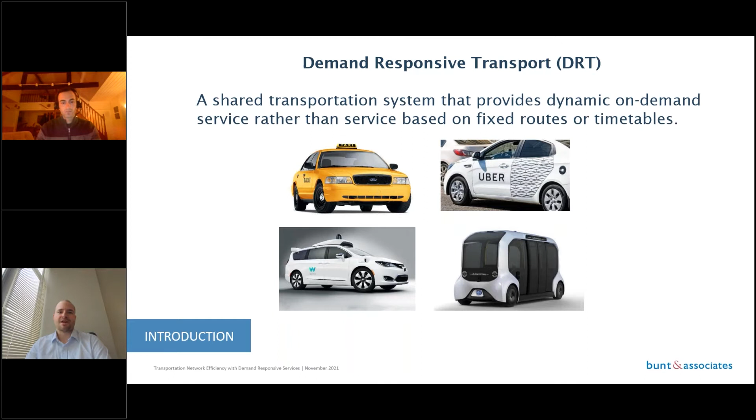When we think about the long-term future of transportation, it's possible that both private vehicles and transit systems could largely be replaced by DRTs. Many studies have looked at this question and evaluated the overall impacts on a city when compared to private vehicle use, considering scenarios with and without existing transit systems in place. The primary difference with this study is that we looked at a more direct comparison between DRT services and traditional fixed route transit services. Specifically, how would the performance of very high frequency fixed route transit compare to a DRT system? This is an important comparison because in a future where AV technology allows for low-cost DRT systems, this technology would also allow for low-cost, high-frequency transit services. So by understanding the advantages and disadvantages of DRT systems when compared to both private vehicles and fixed-route transit, it allows you to plan for future transportation networks in ways that provide the greatest overall benefits to users.

For this study, we used a software tool developed by PTV that simulates DRT services called MaaS, which stands for Mobility as a Service. This tool allows you to set parameters like vehicle capacity, pick-up drop-off points, maximum waiting time, and maximum detour factors, and then simulates DRTs with an optimized service algorithm. This picture shows these simulated DRTs in the network with the number of passengers in each vehicle. So that's an overview of the study.

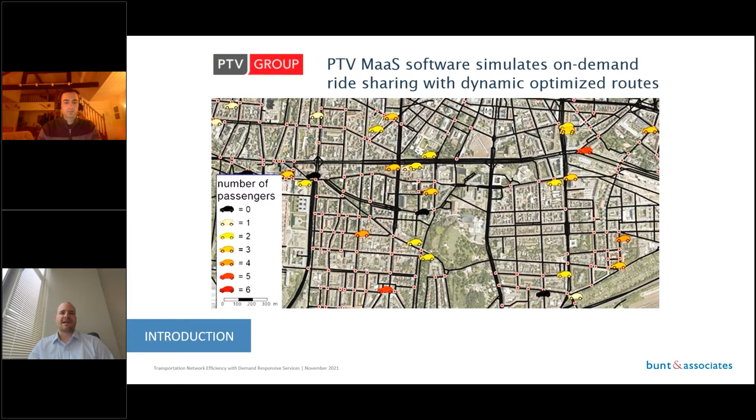Now I'll pass it off to my colleague Nicholas Moss, who helped set up the model and carry out the analysis. He'll walk you through our approach before getting into the results and conclusions.

Thank you, Matt. So for this study, we developed what we call a generic city model. The purpose of using a generic model rather than studying any particular city is that it's flexible. It allows us to gain a high-level understanding of how well we expect the transportation modes that we're modeling to perform in any city. So let's go through what the model looks like.

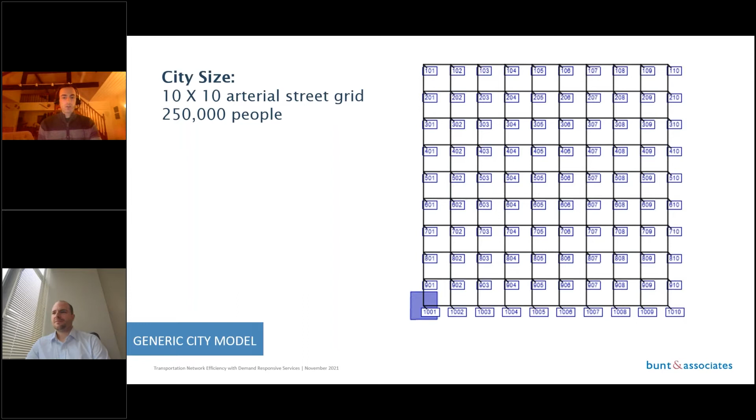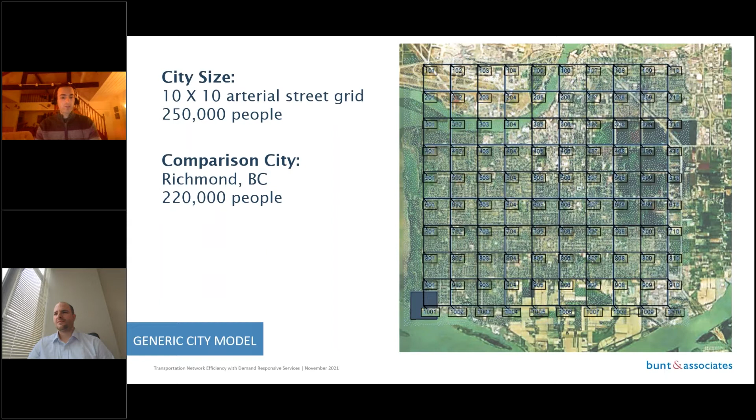The base city model is a simple 10 by 10 arterial street grid network, with a traffic zone centered on each arterial intersection or node. The population of our city is 250,000 people. For comparison, here is our model overlaid at scale on Richmond, which has a population of 220,000 people. The distance between the arterial nodes in our model is 800 meters, which is fairly representative of a typical North American city, and the distance from the traffic zones where trips originate to these nodes is 400 meters.

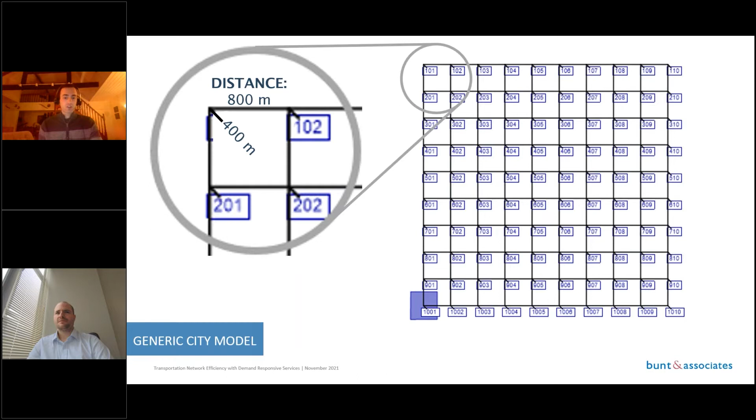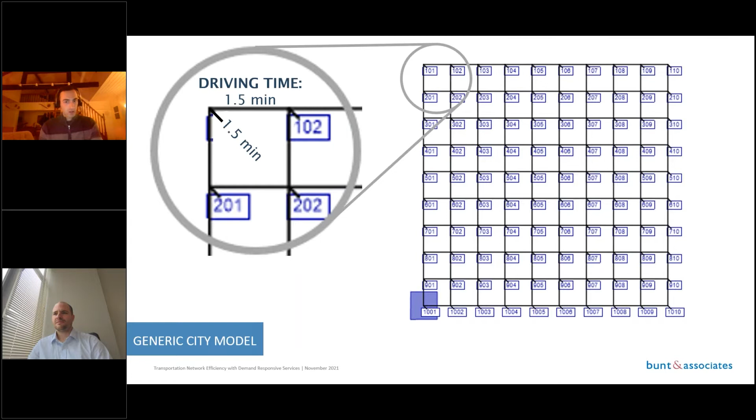In other words, the average person has to travel 400 meters to get to their nearest arterial intersection. The travel times for private vehicles are 1.5 minutes between arterial intersections, and also 1.5 minutes from the traffic zones to the intersections. These are equal despite the different distances because the driving time along arterials is significantly faster than along local roads. The walking time to the arterial intersection is 5 minutes, and we haven't specified a walking time between arterial intersections just because pickup and drop off is always going to take place at the closest arterial intersection or at the traffic zone itself.

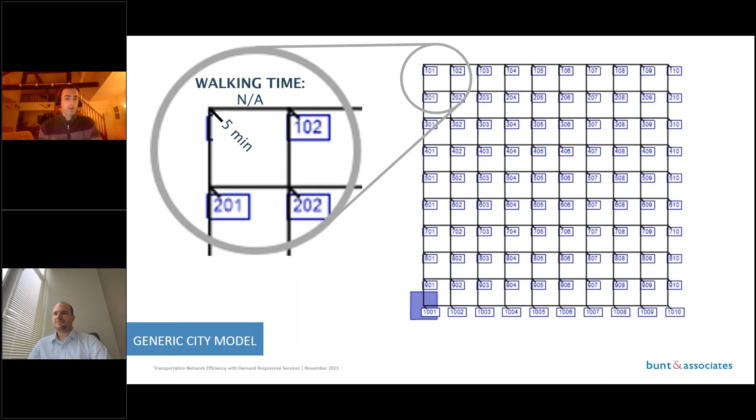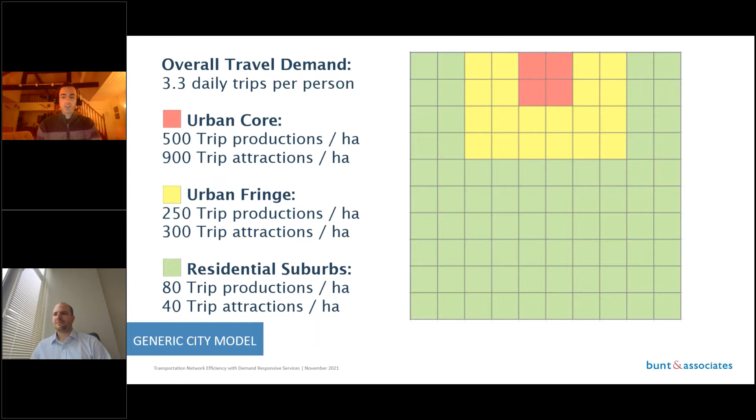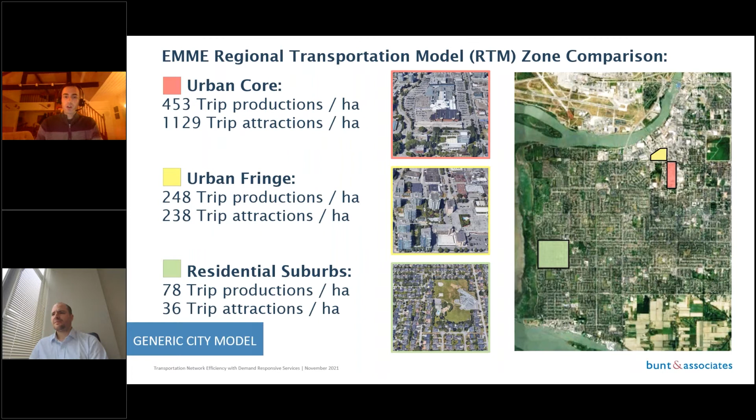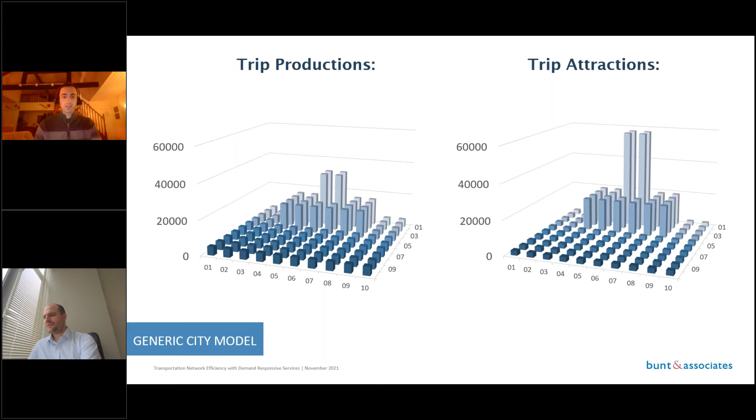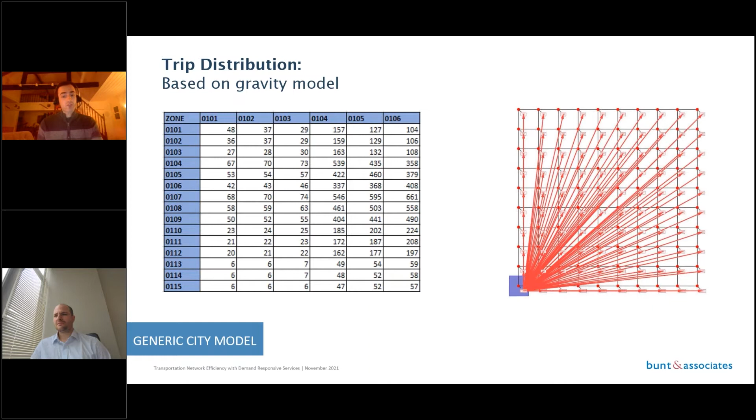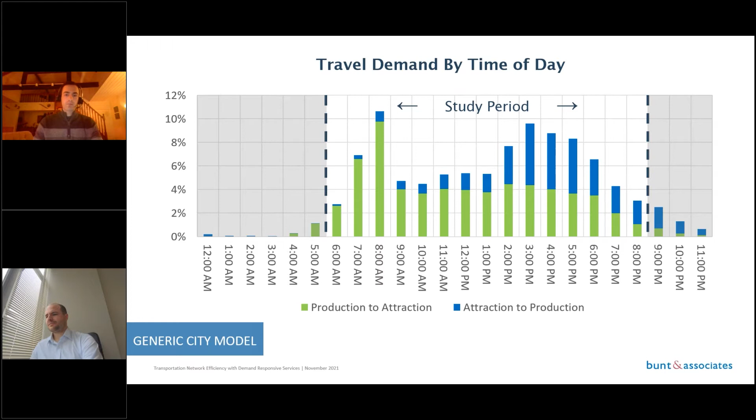So that was the generic city model. Next, let's look at the transportation modes that we assessed within the model.

First mode is private vehicles, which should be familiar to everyone. In this model, all trips were assumed to be completed by one person only, so no groups of people are traveling together, and private vehicles all transport one person only. They provide direct door-to-door service, no waiting time, and they travel at 32 kilometers an hour on our arterial street network, an average speed that includes stopping at traffic lights.

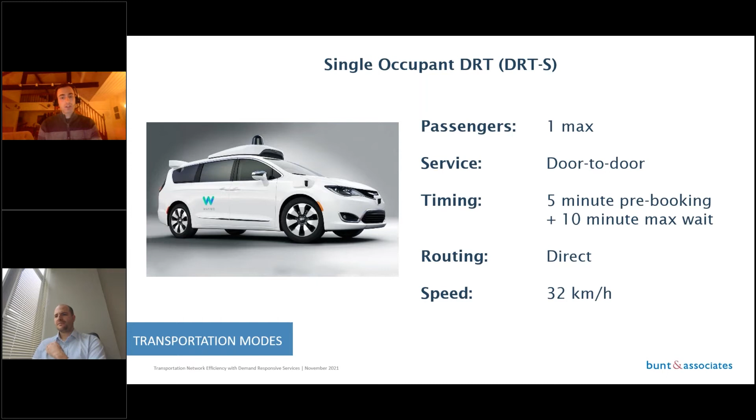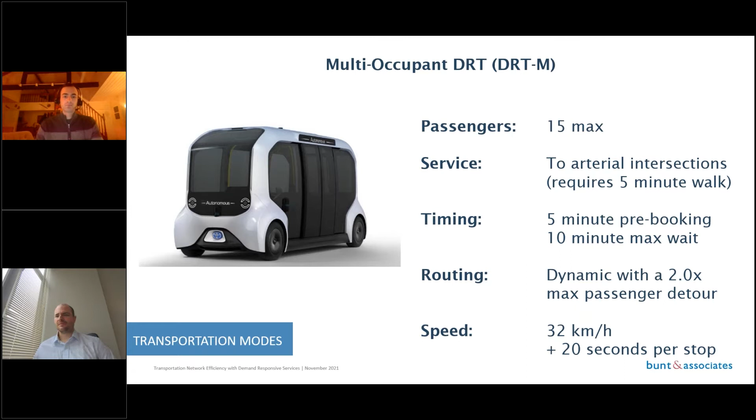The last mode is a standard transit bus with an 80-person maximum capacity. Service is provided on a grid of linear routes on every arterial road in our model, with 5-minute headways on all transit lines throughout the city, which is a very high level of transit service, but potentially more realistic in an autonomous future without drivers. The travel speed of the buses is 24 kilometers an hour, inclusive of stops. Note that because the buses only stop at arterial intersections, that means stops occur around every 800 meters, which is more similar to an express bus.

So at this point, I'll turn it back over to Matt to discuss the model's results.

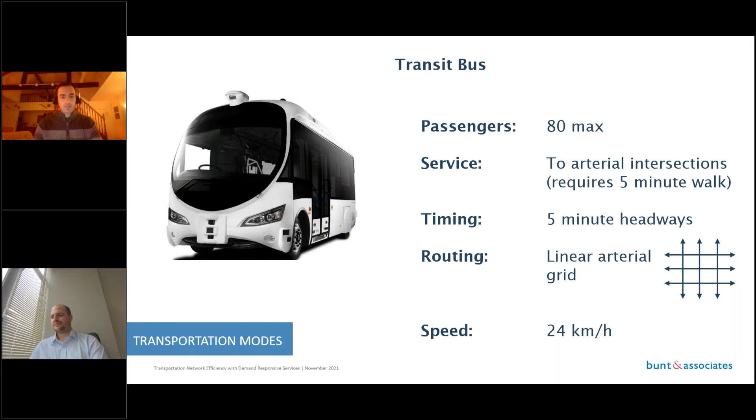Thanks, Nicholas. So now that we've outlined the model, let's get into the results. First, we will review journey times. Next, we'll assess vehicle kilometers traveled. And finally, we'll look at the number of vehicles required.

But before we get into the results, I want to make it clear what we modeled and analyzed. The number of trips for each mode was specified as 15% of all trips, so it's not an estimate of mode choice. We look at the performance of each mode serving the exact same set of trips. The performance results are reported for each mode, not for the city as a whole, and travel time changes resulting from congestion are not modeled.

The reason we structured the study this way is that it allows for direct comparisons of performance between the transportation modes. For instance, we can ask questions like, how many vehicles would be required if all trips on transit buses instead used DRTM?

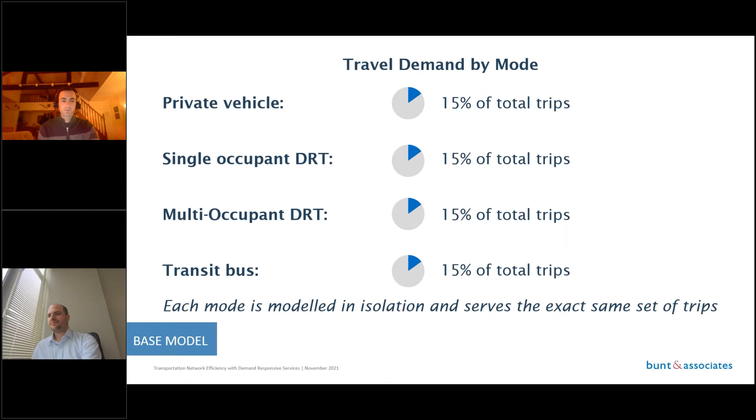So the first performance metric we looked at was journey times, which are split into walk times, wait times, and ride times. As you would expect, each of the alternate modes requires additional journey time as compared to private vehicles, which had an average journey time of 10.1 minutes.

DRTS was found to take 84% more time, with this increase due to the time required to wait for a vehicle to arrive. Also keep in mind that the 5-minute pre-booking time is not included in the total journey time for DRTS and DRTM.

DRTM was found to take 129% more time. This increase is due to the 10-minute walk time to and from the arterial stops. The wait time for this mode is less than with DRTS, because most of the time you would have been waiting is instead spent walking to the pickup location.

And finally, buses required 136% more journey time. With the chosen service parameters, the overall journey times for DRTM and bus are very similar at 23.1 and 23.8 minutes.

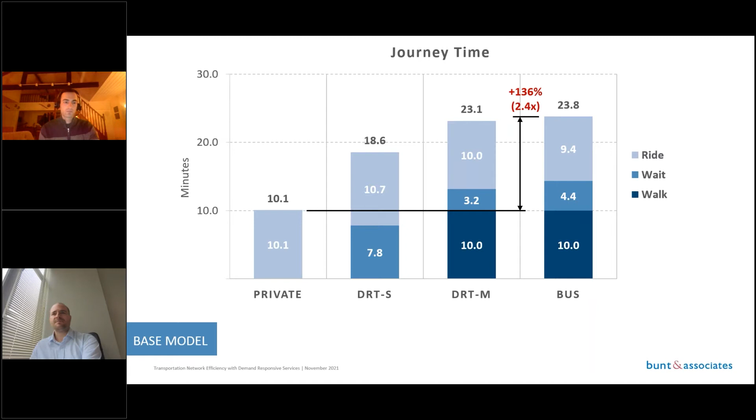So to summarize the results in the previous slides, the finding here was that journey times increased as compared to private vehicle use with all of the shared transportation modes. Given this, many people using private vehicles today may still choose to use them in a future where DRT services are increasingly available.

The next performance metric we looked at is vehicle kilometers traveled, or VKT. Note that this VKT result is for the same 15% of total trips that are modeled for each of the transportation modes. So you can think of a change as the VKT that would be added or removed from the network if that 15% of private vehicles switched to an alternate transportation mode.

With DRTS, there was an 8% increase in VKT compared to the same set of trips in private vehicles. This increase in driving results from vehicles traveling without passengers to their next pickup location.

DRTM resulted in 3 times less VKT than private vehicles. And the 5-minute frequency bus service throughout the city would serve the same set of trips with 10 times less VKT than with private vehicles.

So the results here show that a shift to DRTS could result in additional congestion due to the increased vehicular travel. A shift to DRTM would result in significant VKT reductions, although the benefits of a shift to buses would be even greater.

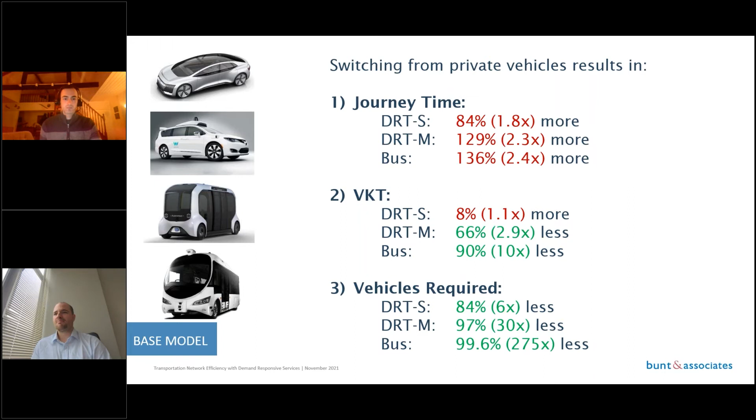Another way to look at these results is that replacing the bus network with a DRTM network would require 3.5 times more VKT and 9 times more vehicles to serve the same set of trips, while only providing minor improvements to journey times. This illustrates that even though there are benefits to DRTM, the efficiencies of a fixed route bus network can far exceed that of an optimized network of DRTs.

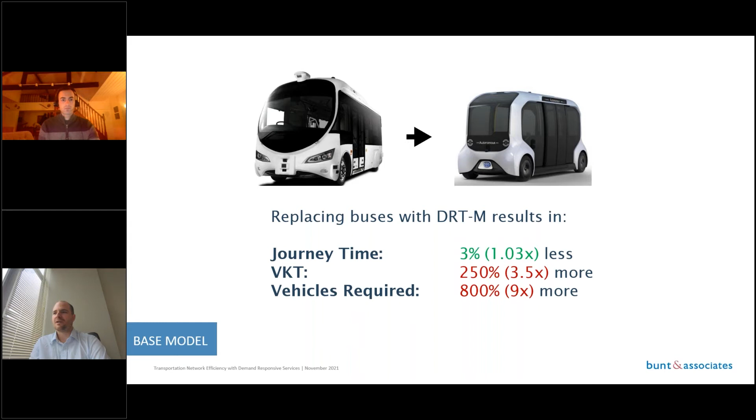So one of the key findings of the previous analysis was that fixed route buses can provide users with similar journey times using far fewer vehicles and VKTs than DRTs would. This raises the question of whether the best strategy for utilizing autonomous technology is to provide even higher frequency fixed route services.

Here we look at a somewhat extreme example where the transit network is replaced entirely by the same set of 15 passenger vehicles used with DRTM, which we'll call microbuses. The microbus network provides the same grid of linear arterial routes, and the lowest frequency is 5 minutes, but to meet the peak travel demands on each route during each hour of the day, this frequency is increased up to at most 1 microbus per minute.

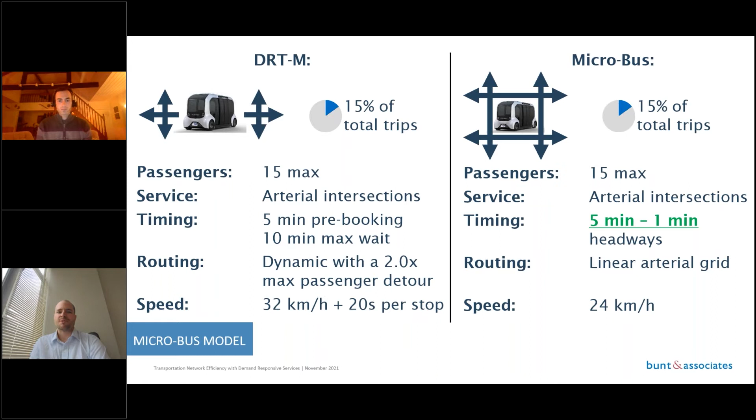Compared to DRTM service, this resulted in a 5% reduction in average journey time, from 23.2 to 22 minutes. There's also 2 additional things to consider here when comparing the journey time results. The first is that DRTM also requires a 5-minute pre-booking time, which is not included in the journey time, while microbus does not. This allows for more spontaneous trips and frictionless planning with the microbus network.

The second is that in this simplified model, everybody walks 5 minutes to the pickup location. But in reality, some people will have shorter walk times. And this would directly reduce journey times using the microbus network. But with DRTMs, reductions in walking time may be offset by additional wait time.

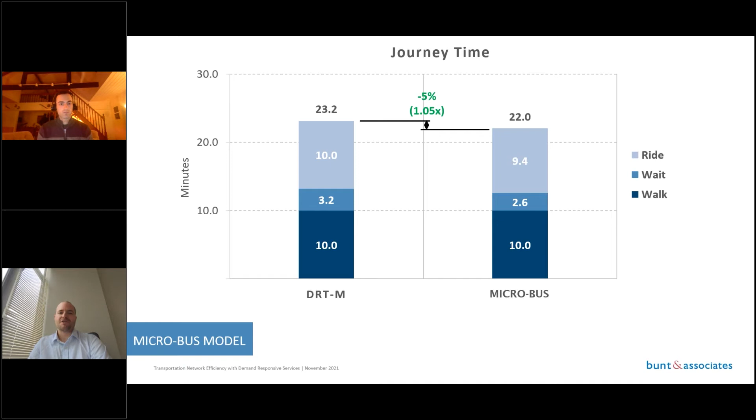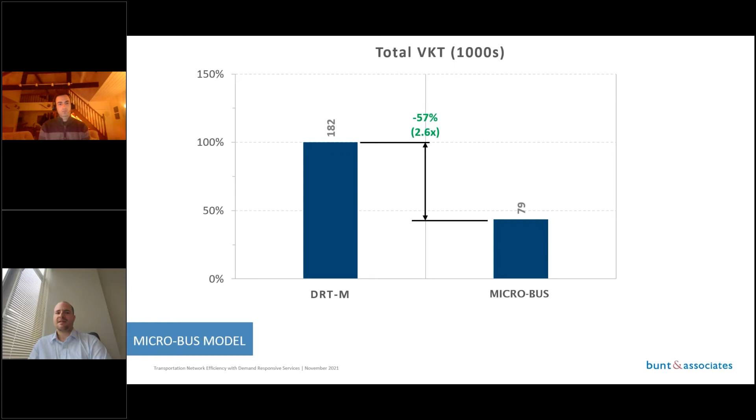Looking at VKT, the microbus network required 2.6 times less than DRTM. And compared to DRTM, 4 times less vehicles were required with the microbus network. So to summarize, using the exact same type of vehicle, the high-frequency microbus network provided improved journey times with 4 times less vehicles and 2.6 times less VKT. This indicates that this type of ultra-high frequency service could be provided at a lower cost given the need for fewer vehicles and less kilometers driven.

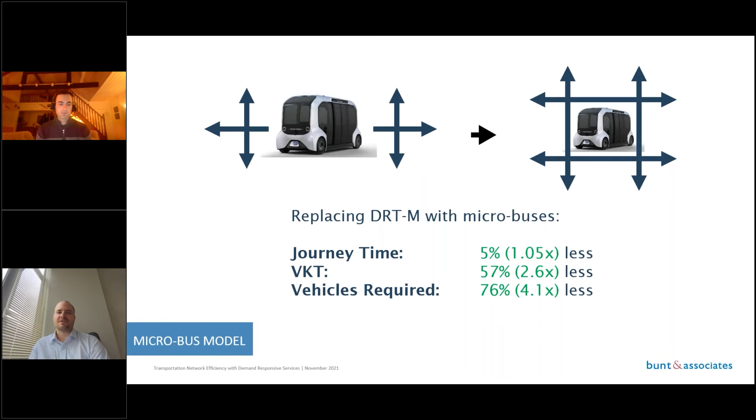Many users might also prefer the microbus service, regardless of cost. It provides shorter travel times, particularly for those already close to a stop, and requires less pre-planning. Although transfers between bus lines would be required for many trips, given these extremely high frequency of service on these routes, these transfers might be considered a minor inconvenience by users. The design of these services could also aim to make transfers as smooth and simple as possible.

Next, we wanted to look at how different characteristics of the city could impact the performance of each of these modes. One of the parameters we tested was the share of demand using each mode.

Again, each mode is modeled in isolation with the exact same set of trips, so these demand shares would apply to all modes. As noted previously, congestion effects are also not considered in the model. So the performance impacts of changing these demand shares is directly attributable to the transportation modes themselves, rather than to interactions between modes or changing travel times due to congestion.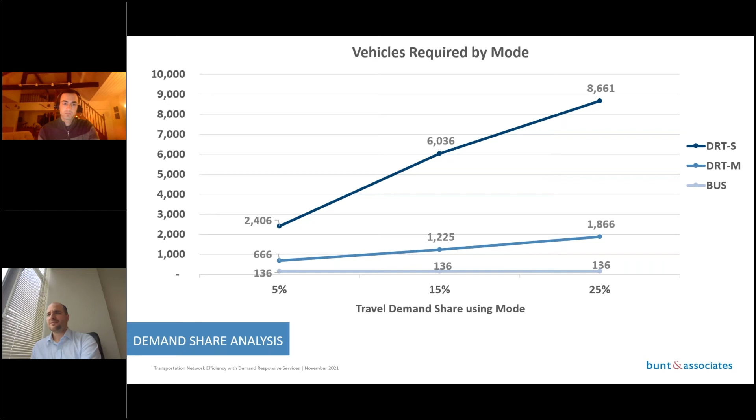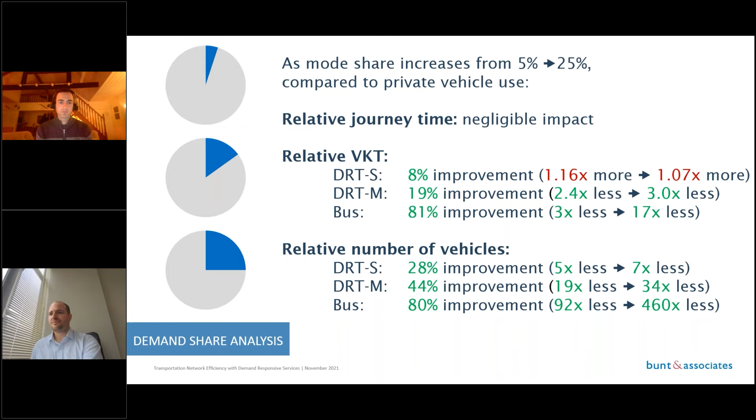This is an overall summary of the previous results. Relative to private vehicle use, improvements were found for all of the shared modes. However, the largest improvements were for bus services. Another way to look at this is that replacing bus trips with DRTM, the relative VKT is 320% worse, and the relative number of vehicles required is 180% worse when shifting from a 5% to a 25% mode share.

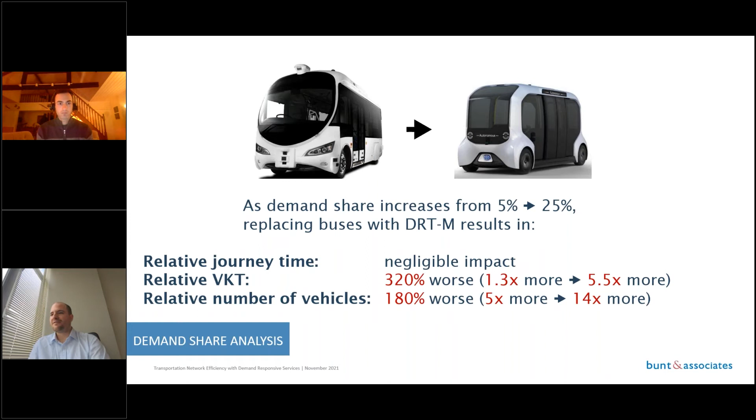So what this means is that as demand for shared modes increases, it makes sense to focus more resources on high-frequency fixed-route services. Additionally, when demand for shared modes is low, DRTM might outperform bus or at least provide more comparable performance. For instance, at the lowest 5% mode share tested, only 30% more VKT was found with DRTM compared to buses, although 5 times more vehicles were still required.

The last parameter that we tested was the impact of city size. The base city model we used was a 10 by 10 arterial grid with a population of 250,000. The small city model we tested was a 5 by 5 grid, and the large city model was a 15 by 15 grid. The population density, proportion of zones of each type, and the layout of the city remain the same between each scenario.

As relevant comparison cities, you could think of Mission, Richmond, and Surrey. And these models all assume the same 15% demand share for each mode used in the base model.

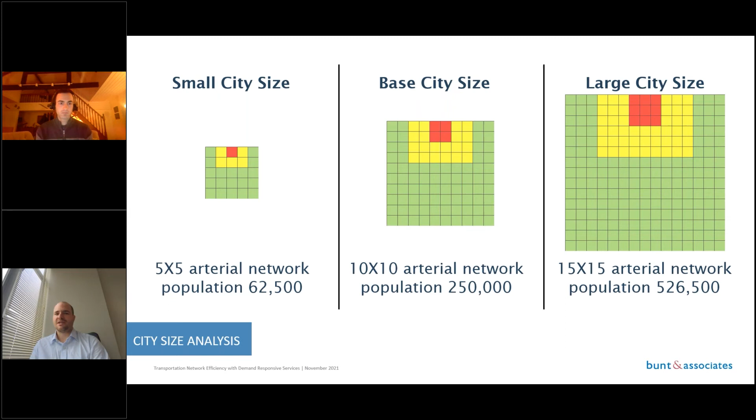Average private vehicle journey times were 7 minutes for the small city, 10 minutes for the medium city, and 12 minutes for the large city.

Comparing DRTS to private vehicles, 2.2 times longer journey times were required in the small city and 1.7 times longer in the large city. So relative improvements were found as city size increased, because the driving time was a larger proportion of the total journey time, making the relative impact of the waiting time required with the DRTS and DRTM modes less pronounced.

Comparing DRTM to private vehicles, 2.5 times longer journeys were required in the small city, while 2.2 times longer journeys were required in the large city. And with buses, 2.8 times longer journeys were required in the small city and 2.2 times longer in the large city.

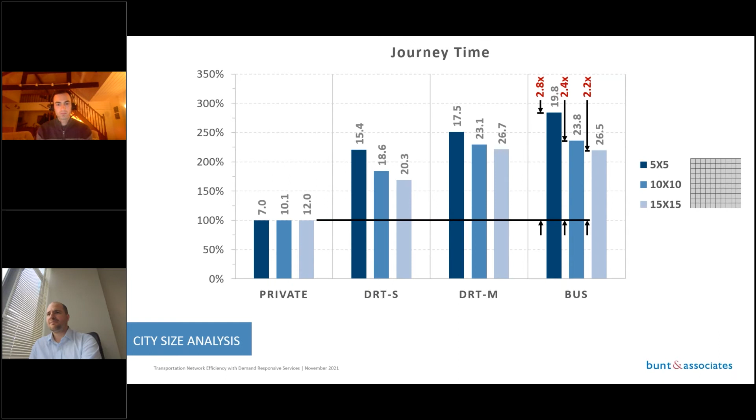For VKTs, 85,000, 531,000, and 1,468,000 were found in the small, medium, and large cities, respectively, with private vehicles.

Comparing DRTS to private vehicles, 11% more VKT was required in the small city and 8% more in the large city. For DRTM, 2.6 times less was required in the small city and 3.1 times less in the large city.

And for buses, 7 times less was required in the small city and 12 times less in the large city. So as city size increased, the relative VKT improved 2% for DRTS, 17% for DRTM, and 41% for buses.

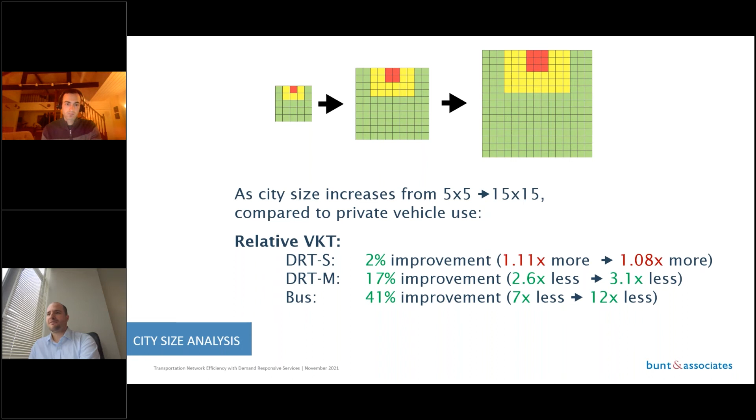Here we compare the shared modes directly. The finding is that as the network size increases, the VKT for the demand responsive services increases exponentially at a greater rate than the bus services.

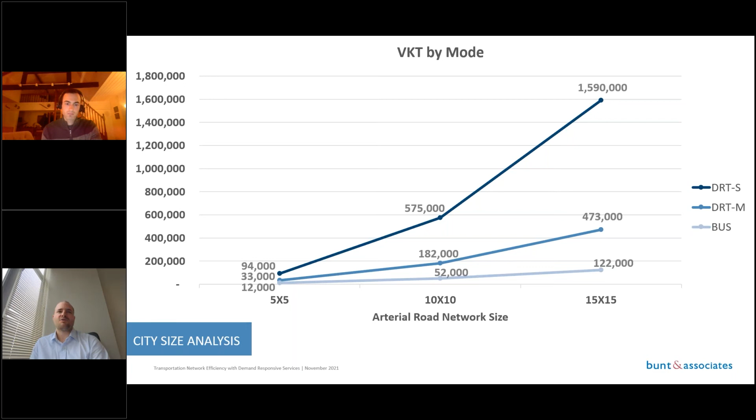Next, we look at the number of vehicles required. This was about 9,000 in the small city, 38,000 in the medium city, and 84,000 in the large city for private vehicles. Again, this is related to the 15% demand share, which could be considered the proportion considering to switch to an alternate mode rather than every private vehicle in the city.

So comparing DRTS to private vehicles, 8.2 times fewer were required in the small city, while 5.6 times fewer were required in the large city. For DRTM, 43 times less were required in the small city, and 21 times less were required in the large city.

And for buses, 310 times less were required in the small city, and 270 times less were required in the large city.

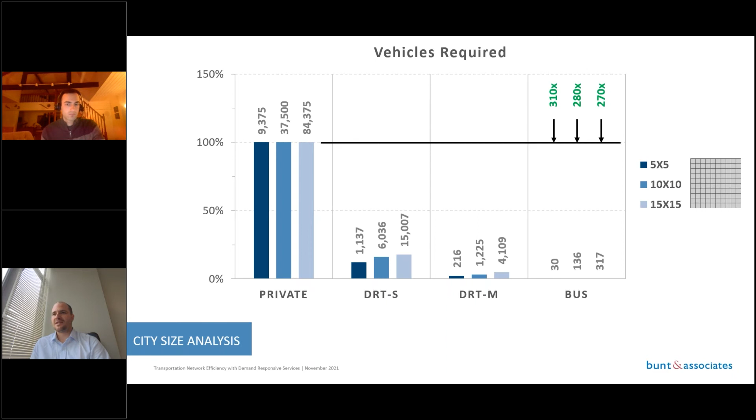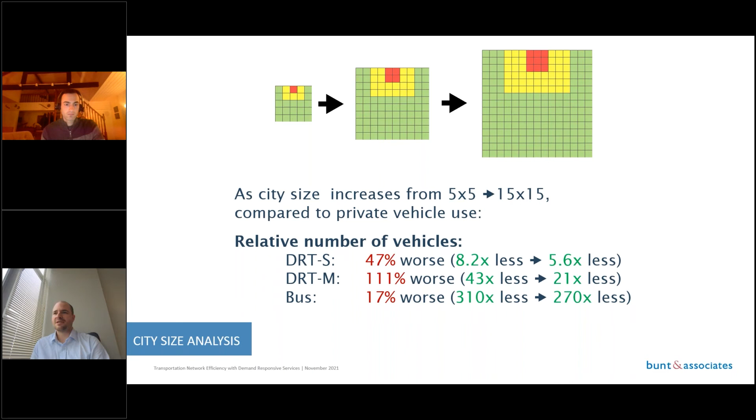To summarize, with each of the shared modes, as city size increased, the number of shared vehicles required increased relative to private vehicles. This translates to 47% worse for DRTS, 111% for DRTM, and 17% for buses.

Comparing these directly, we see that same exponential increase in the number of demand responsive vehicles required and smaller increases in the number of buses required. So in the large city network, we're looking at 4,100 vehicles for DRTM versus 317 vehicles for buses.

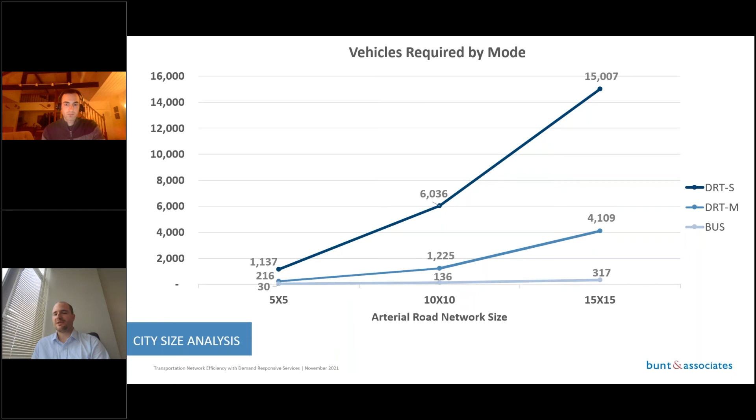Overall, the results show that with increasing city size, buses have the largest VKT performance improvements and the smallest decline in the relative number of vehicles required.

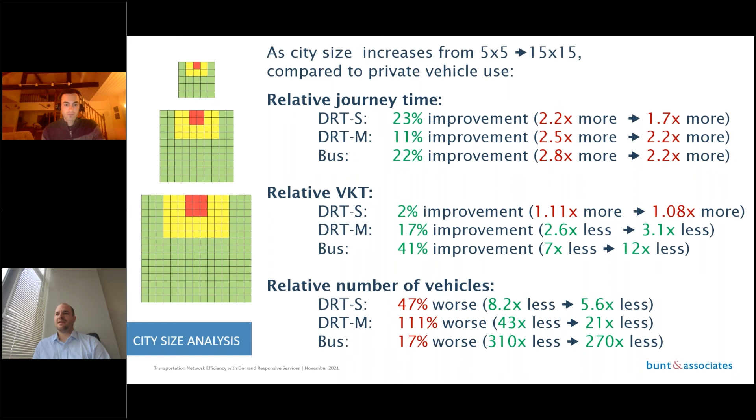Again, we can look at this to see how replacing the bus network with a DRTM network would impact performance under these different scenarios. So when shifting from a small city to a large city and comparing DRTM to buses, the relative journey time of DRTM is 14% worse.

Relative VKT is 41% worse, and the relative number of vehicles required is 80% worse with DRTM. This indicates that the benefits of transit become even greater in larger cities and service areas.

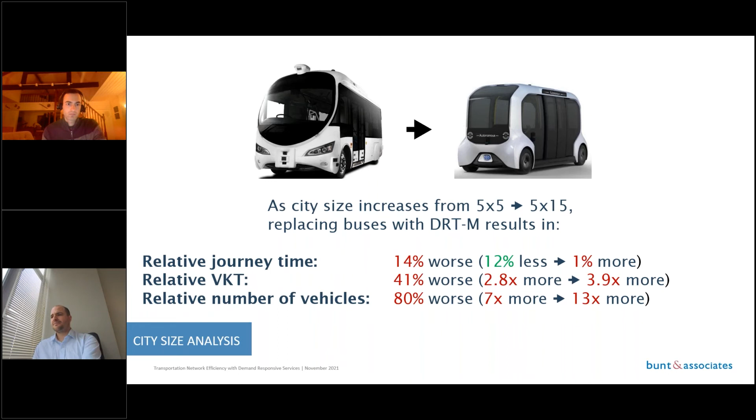So those were the results of the analysis. What are the overall conclusions? First, a switch from private vehicles to DRTS would result in additional VKT, but it does require far fewer vehicles. Next, a switch from private vehicles to DRTM would reduce VKT and require even fewer vehicles than with DRTS.

And last, despite the benefits of DRTM, a high-frequency fixed-route bus service could provide similar travel times for users, but with far fewer vehicles and VKT required.

An important note here is that for any of these transportation modes, they could be autonomous or manually operated. Although we don't directly look at costs in this presentation, the cost of operating any of the shared modes could be substantially lower because a driver is not required. But the thing to keep in mind is that the relevant comparisons are between either autonomous or manually operated services, because when AV technology becomes available for one mode, it will likely be available for all of these.

The key policy implication we found with this research is that in a future where autonomous vehicles are readily available, utilizing this technology to provide a network of high-frequency fixed-route buses can provide even greater benefits than on-demand door-to-door services. As transportation professionals, we should be planning for these types of services.